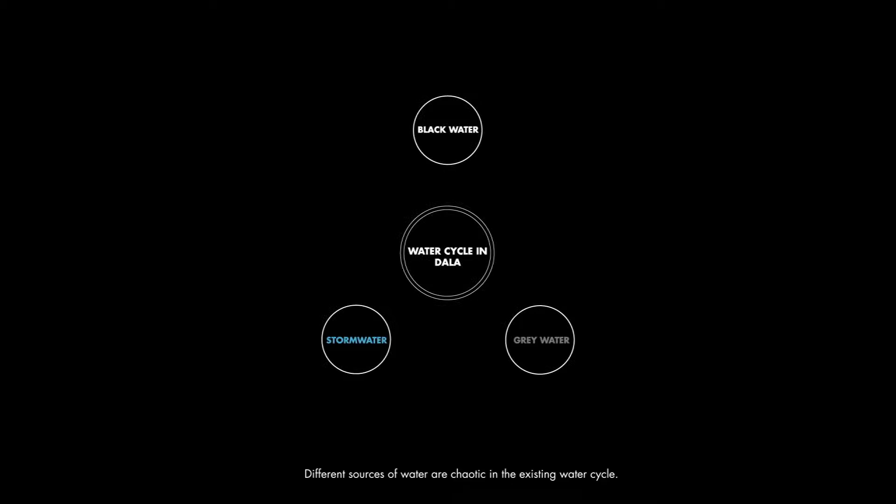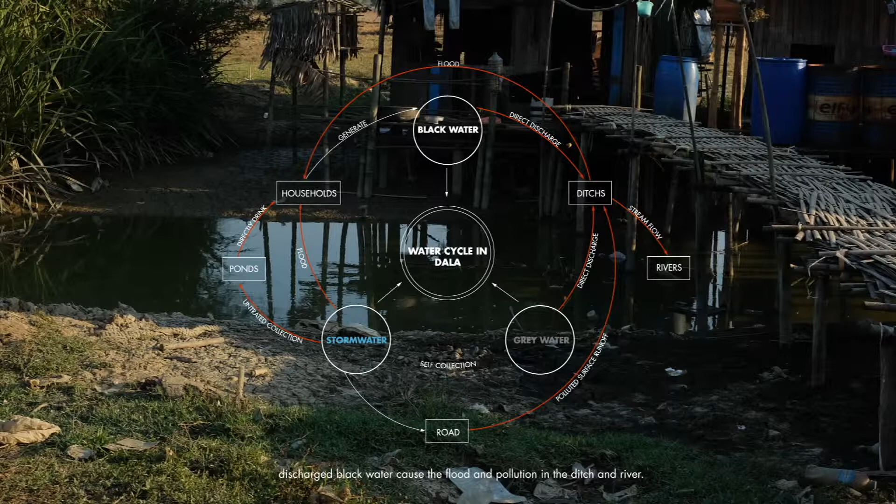Water is the most urgent issue DALA is facing nowadays. Different sources of water are chaotic in the existing water cycle. Untreated drinking water collection, direct surface runoff, and discharged black water cause flooding and pollution in the ditches and river.

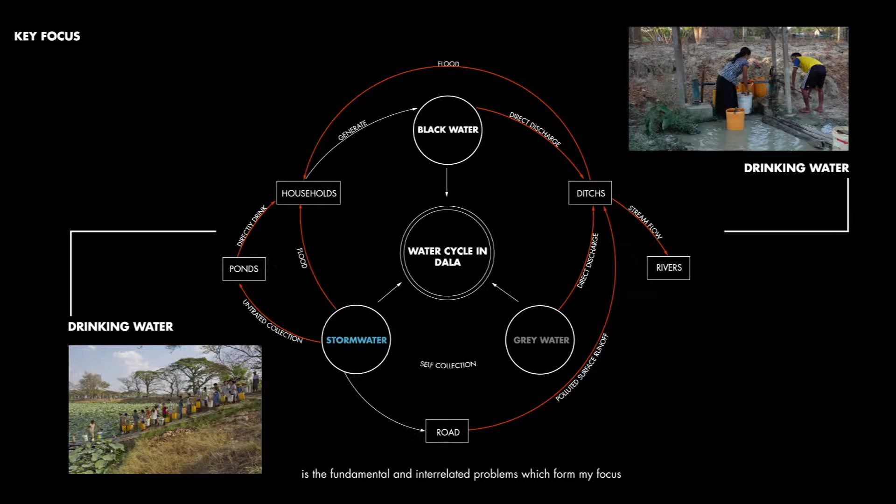Among these, the drinking water issue and lack of perception of water sustainability is a fundamental and interrelated problem which forms my focus. The drinking water system in DALA is vulnerable. People can get water through limited tube wells and expensive bottled water in water shops.

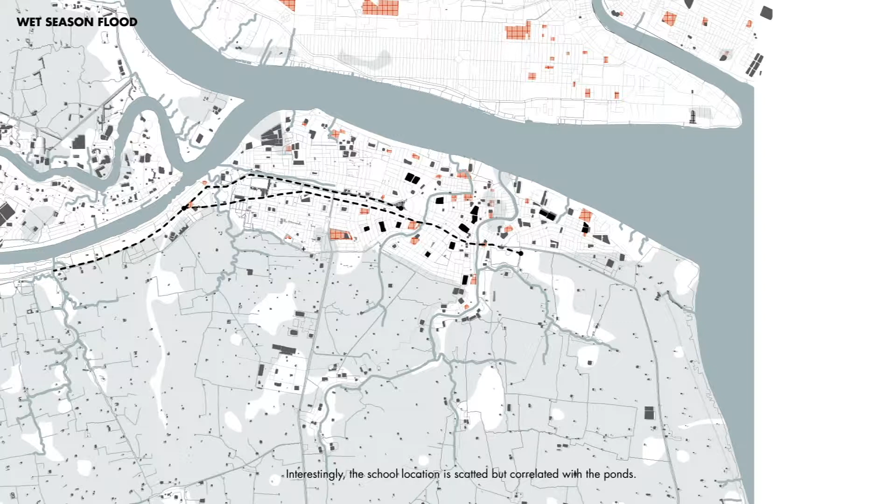However, the most fundamental way of getting water is from the lotus ponds. In the rain season, ponds and streams are usually saturated. Interestingly, the school locations are scattered but correlated with these ponds. Small ponds were dug by schools to reach self-sustainability, but most small ponds in schools dry out because of low capacity.

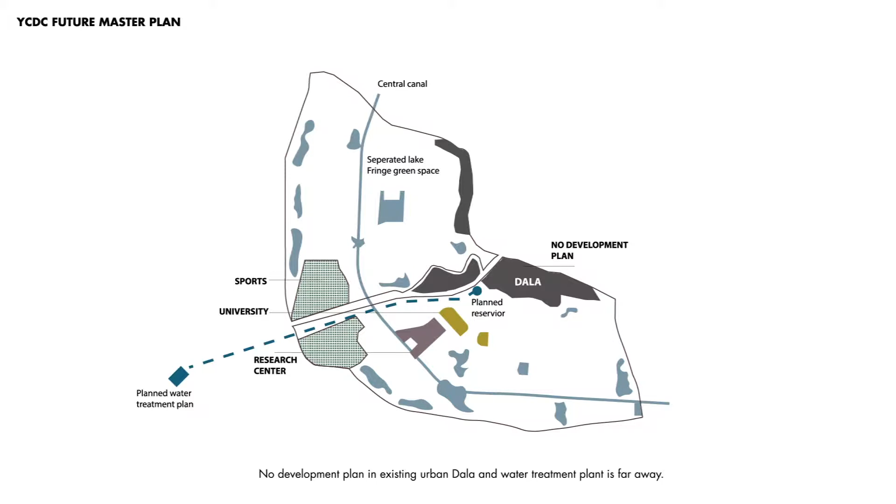Generally, the drinking water issue seems not to get enough attention from the YCDC government. There's no development plan in existing urban DALA, and a water treatment plant is far away. Therefore, these issues form my design goals.

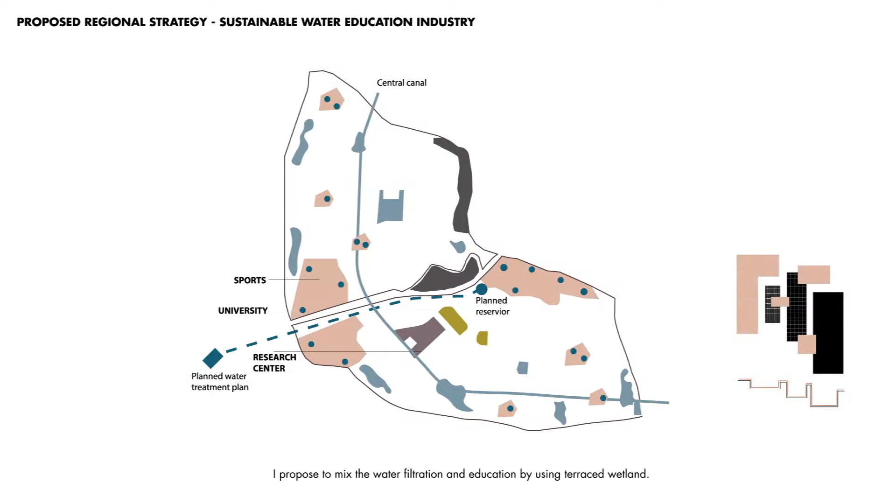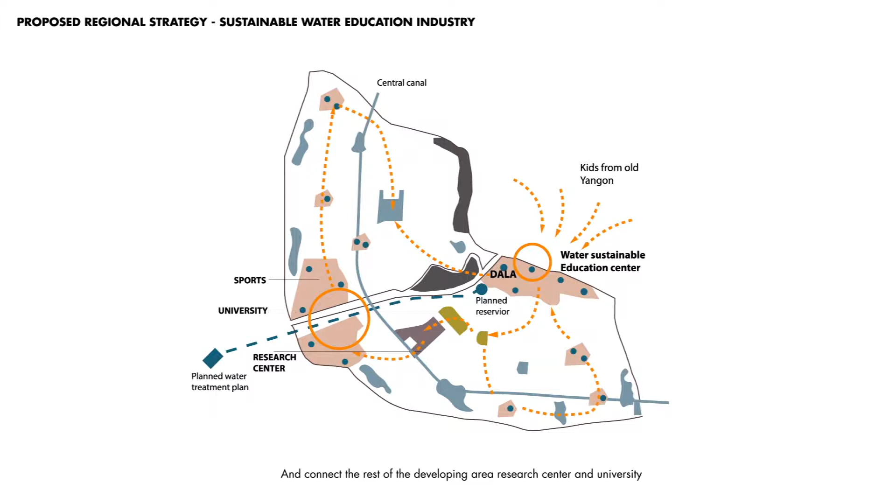Instead of a single functional zoning plan, I propose to mix water filtration and education by using terraced wetland, so that urban DALA can be a pilot water educational center using its strengths that attract kids from old Yangon, and connect the rest of the developing area, research center, and universities.

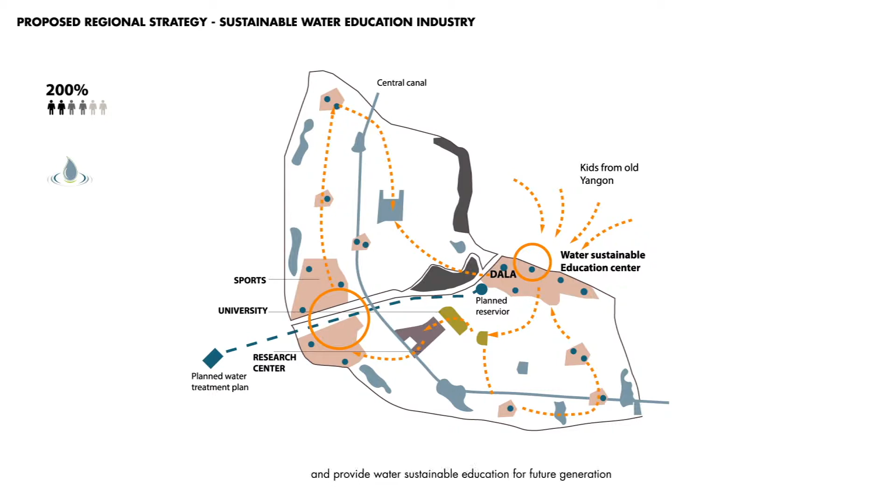to form a sustainable water education industry. Facing the increasing population, it can improve the quality and capacity of potable water and provide water sustainable education for future generations. The detailed design strategy is to change the original flat topography and homogeneous ponds, creating different levels and functions of ponds.

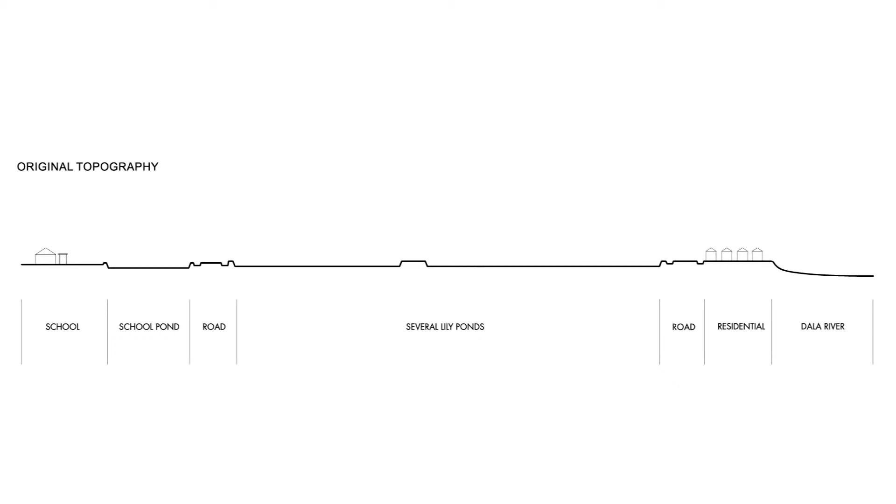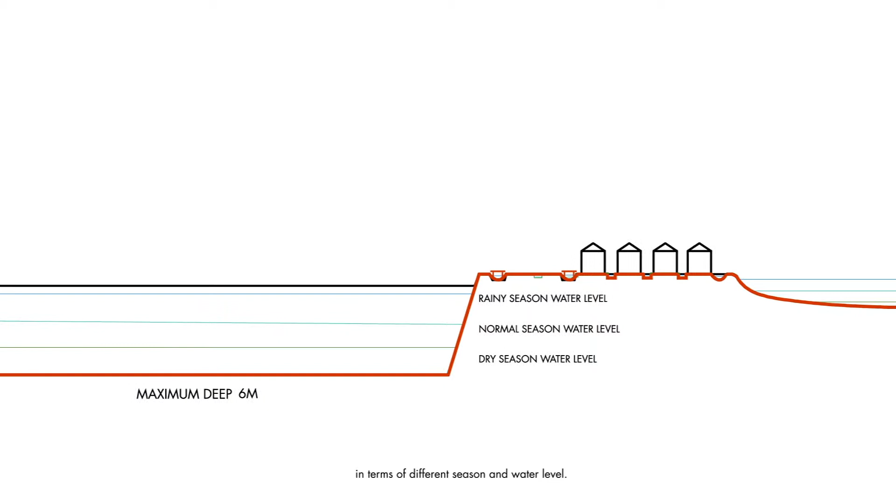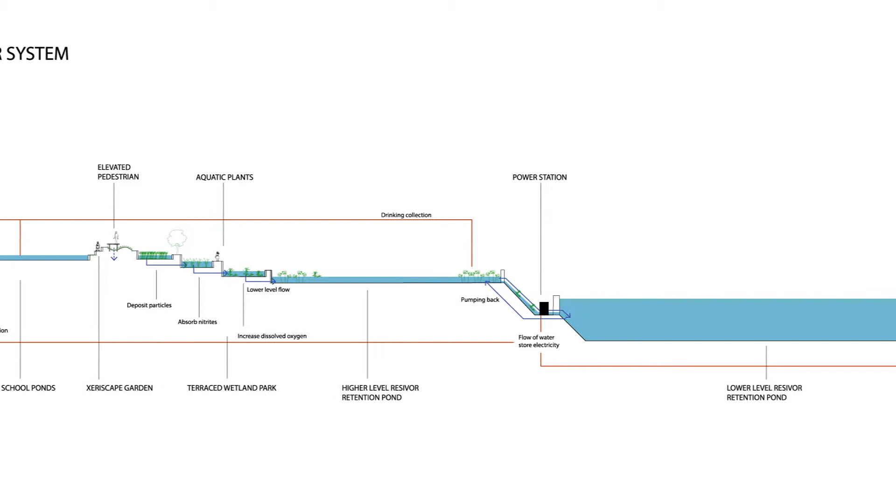to form terraced wetlands as a drinking water filter, as well as flexible educational playgrounds in terms of different water levels. In normal days, rainwater is collected by channels and pores and stored in underground tanks or central reservoirs. This flow of water is designed to generate power.

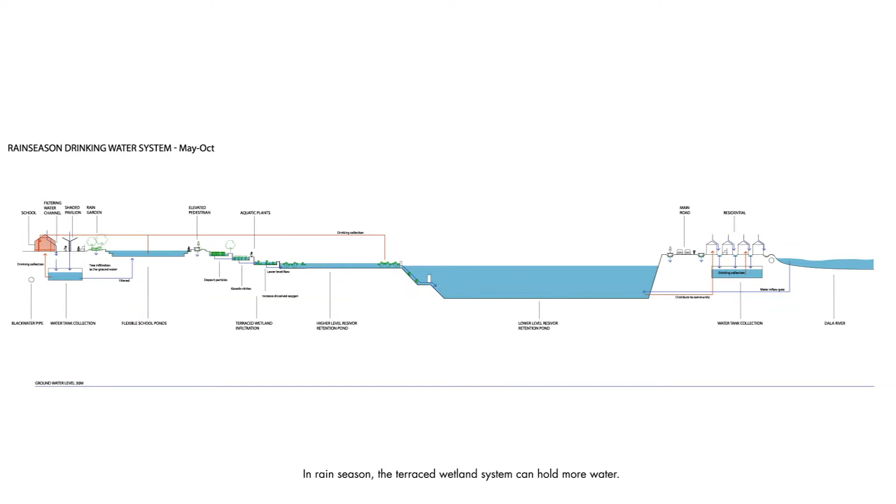The stored power supplies the water cleaning mechanism, which is self-sufficient. In the rain season, the terraced wetland system can hold more water. In the dry season, the central reservoirs keep watering. Other terraced ponds that dry out can be extra play spaces for children.

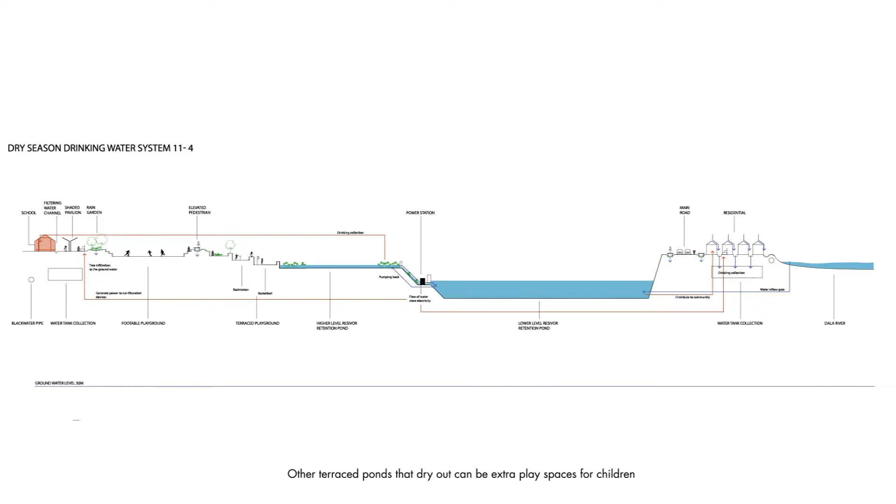Therefore, in order to apply this typical section, several locations can be chosen. Among these, a pilot area was chosen to do the detailed design. There are two types of terraced wetland. The first is the salty water wetland near the riverfront.

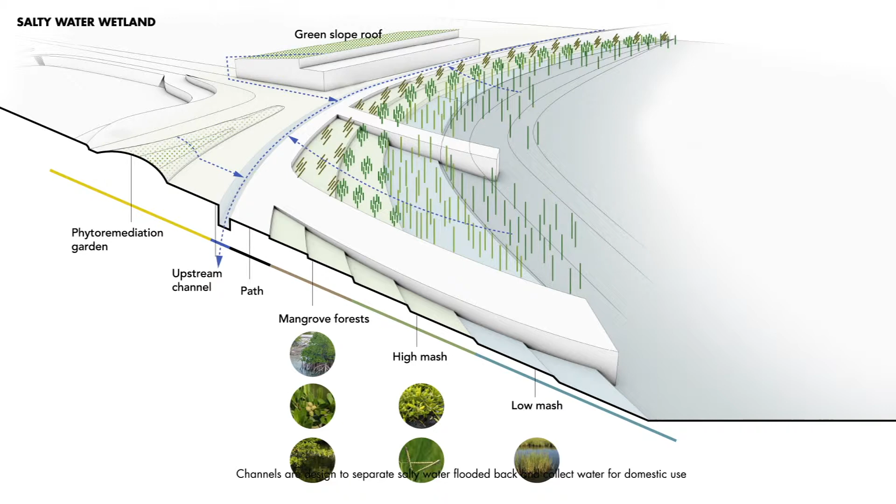Different salty tolerance plants are used to filter extended seawater. Channels are designed to separate the salty water, hold back floods, and collect water for domestic use. In the center, there is a freshwater wetland system, including different functional ponds.

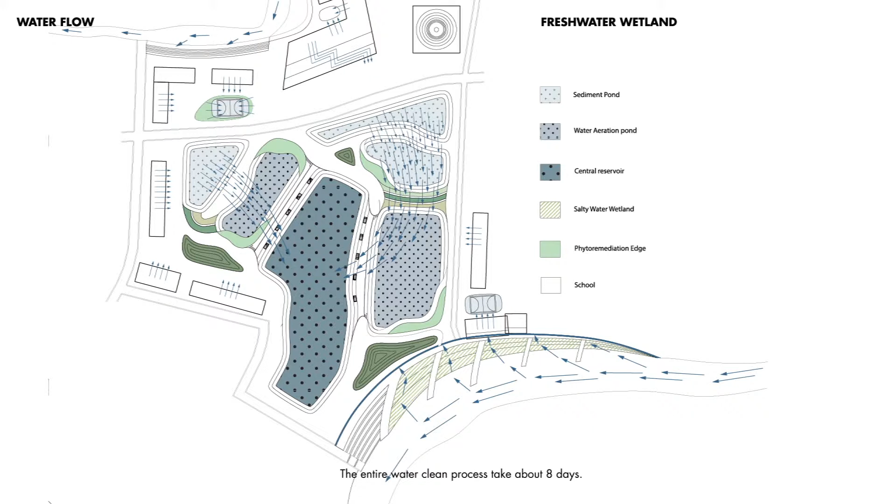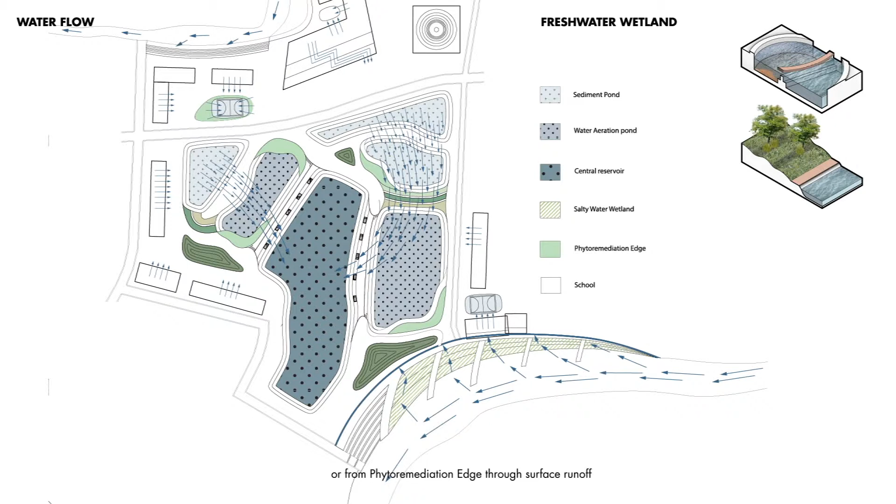The entire water cleaning process takes about 8 days. The rainfall is first collected in the upper sedimentation pond directly, or from the phytoremediation edge through surface runoff. After precipitation, it transfers to the water aeration ponds through a shallow water treatment channel, and finally it is stored in the central reservoir.

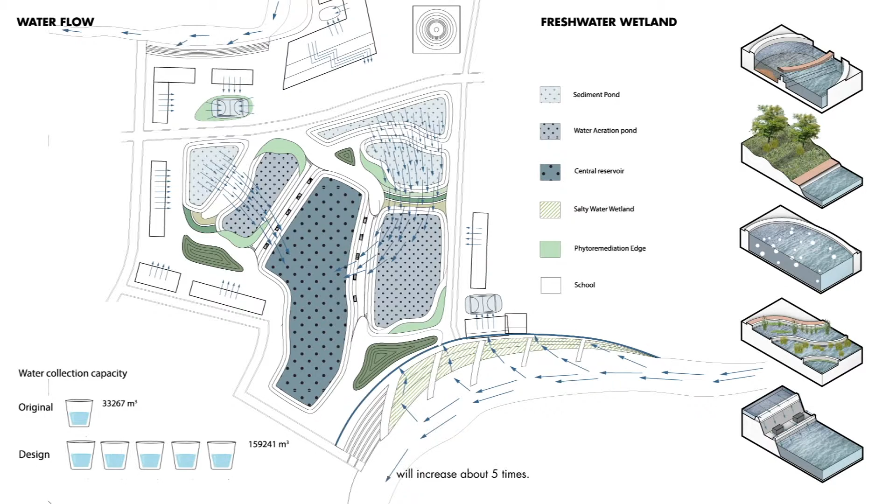By this design, the total water collection capacity will increase about 5 times. In order to make the water treatment process a form of public education, the whole water treatment is designed to be observed by children through different types of platforms and activities.

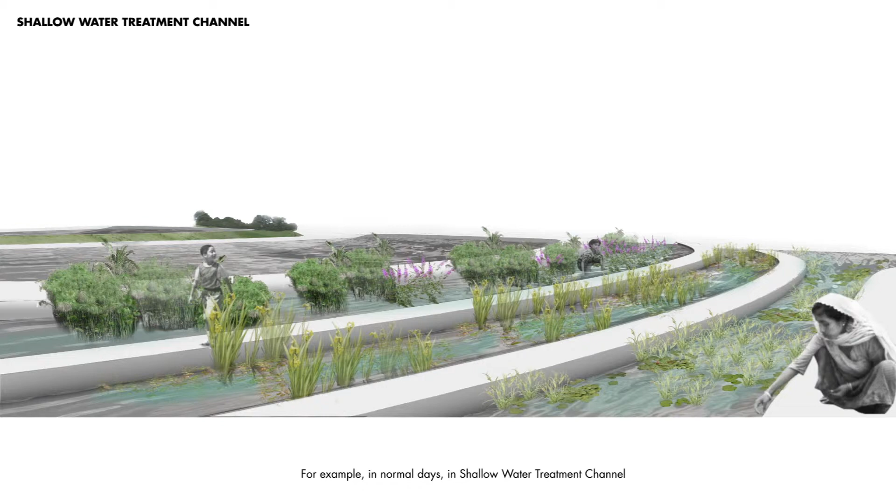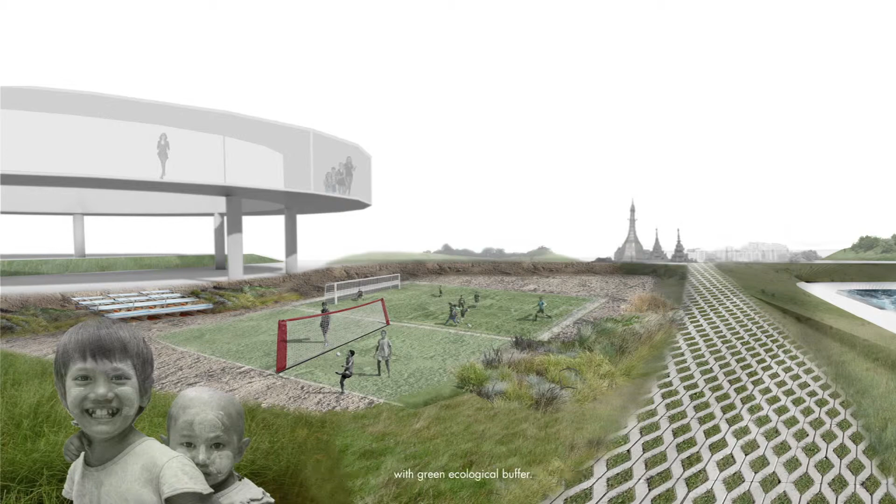For example, in normal days, in the shallow water treatment channel, children can experience the water and learn about functional local plant species. In the dry season, low-level ponds can be reused as playgrounds with a green ecological buffer. In the rain season or extreme weather, elevated observation rooms can still be used for education.

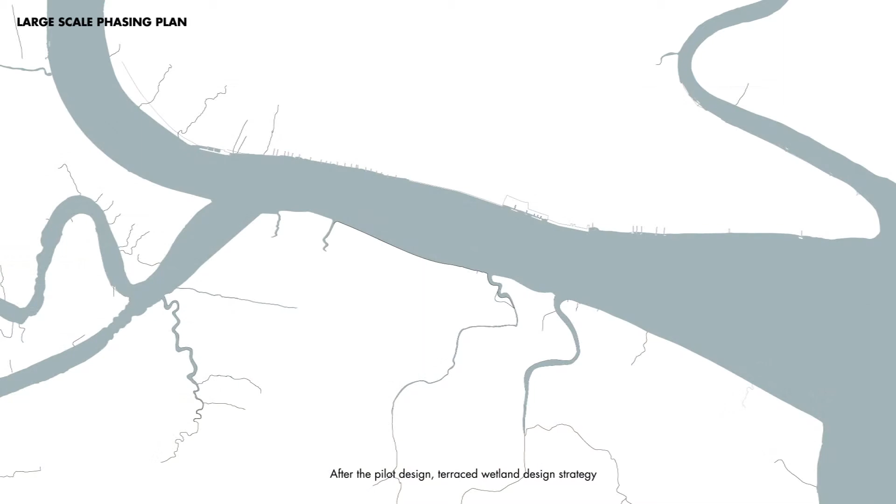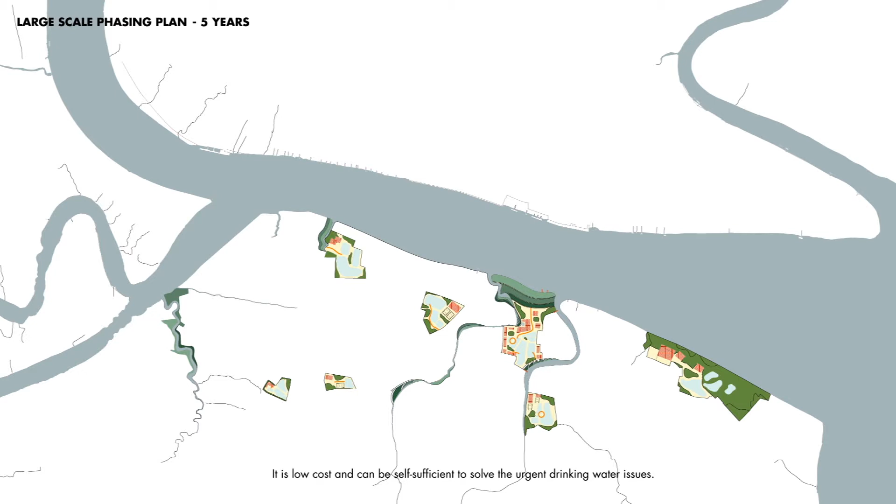After the pilot design, the terraced wetland strategy can be applied to other similar places within 5 years. It is low cost and can be self-sufficient to solve the urgent water issues at a community scale. Within 10 years, individual sites can be connected with planned water plants, reservoirs, and local pipe systems.

In 20 years, when DALA is connected by city tap water, these terraced wetlands can be preserved as parks and connected by a green and blue system, which enlarges the ecological function.

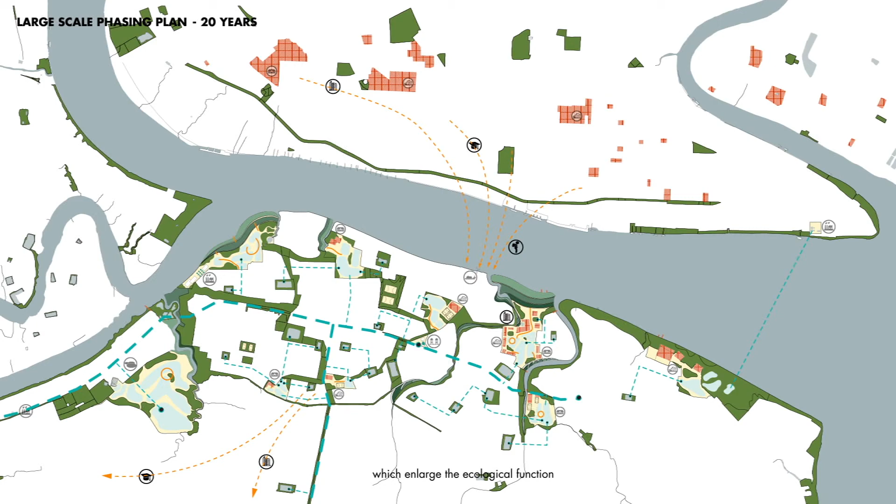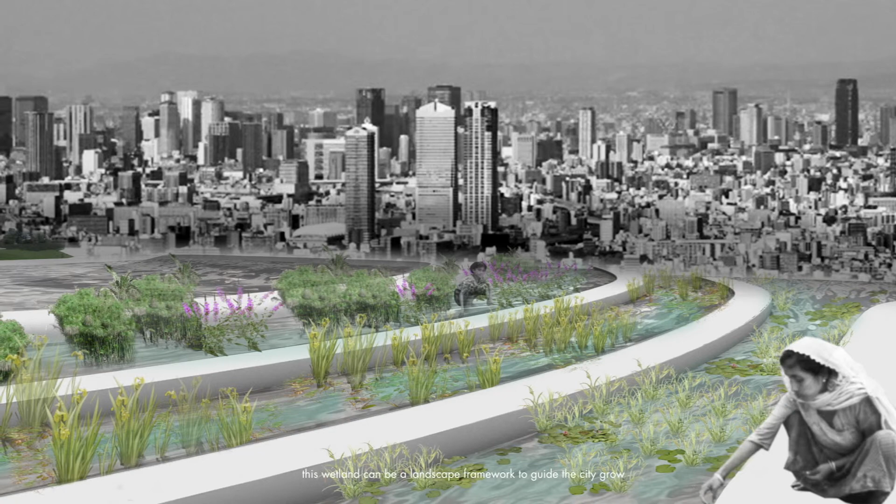To summarize, it is anticipated that with future population growth and construction in DALA, this wetland can be a landscape framework to guide the city's growth and increase the perception of wastewater, in the end contributing to the capacity building of DALA.